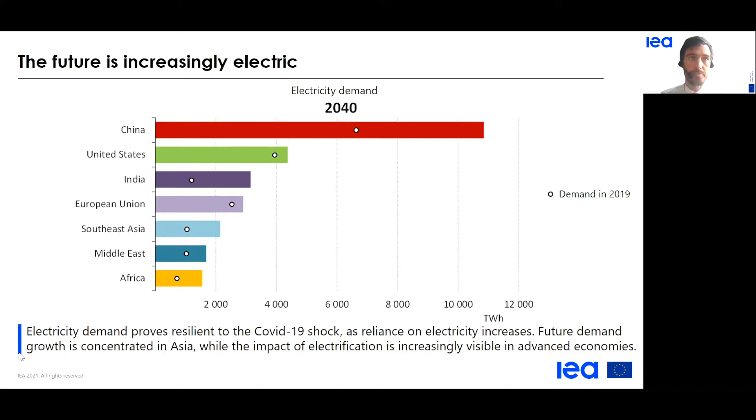And reasons for this growth are solar PV cost declining all over the world, strong policy support, and cheap financing, making solar PV the cheapest electricity source in most regions and most countries of the world.

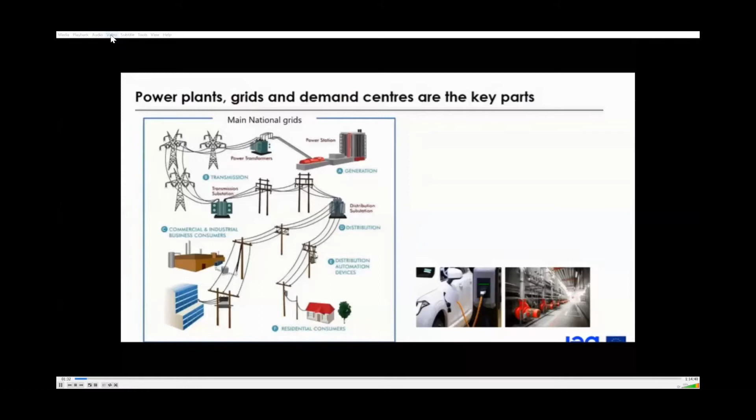And third, between those two groups, you have the grid, transmission, distribution grids, and other related infrastructure, that connects those two broad groups. So this is for the grid connected element of power systems. You have, in addition, some off-grid elements. They can be divided between mini-grids and standalone systems.

We need now to remember that this is a picture taken at one point in time. For example, regarding the national grids, traditionally this has been only one direction flows from generation centers to demand centers. Now this traditional way of looking at flows is becoming blurrier and blurrier. You can see that more and more consumers are generating their own electricity and injecting it into the grid. So this traditional unidirectional flow is becoming more multidirectional.

So that is on the national grid side. On the off-grid side, we can think that some off-grid elements can at some point be integrated in the national grids. Mini grids can be connected at some point in time to the main grids. So in this presentation, we will look mainly to on-grid systems, and we will leave the off-grid ones to a separate webinar.

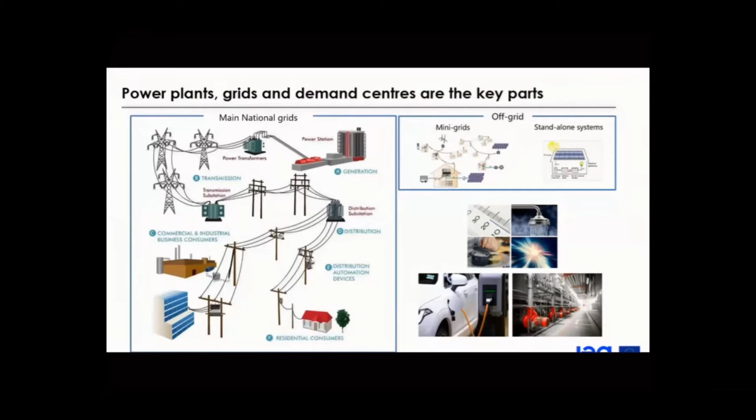Today, we will focus mainly at the supply side of things. We will focus really at the generation part of the power sector. Of course, demand side is really important. Electricity demand level, electricity demand shape will really impact the power sector's operation and their evolution over time. Over the course of the year, over the course of a month, over the course even of a day, or even at a shorter time frame, this will have impacts on the operation of power sector generation.

So more on demand. We looked yesterday at end-use sector energy demand. Electricity accounts for a very important part of it. At the global level, we are talking about one fifth of end-use sector energy demand that are met by electricity. And if we consider that electricity has a higher conversion efficiency compared to other fuels, other energy vectors, then this share of useful energy is even much, much higher.

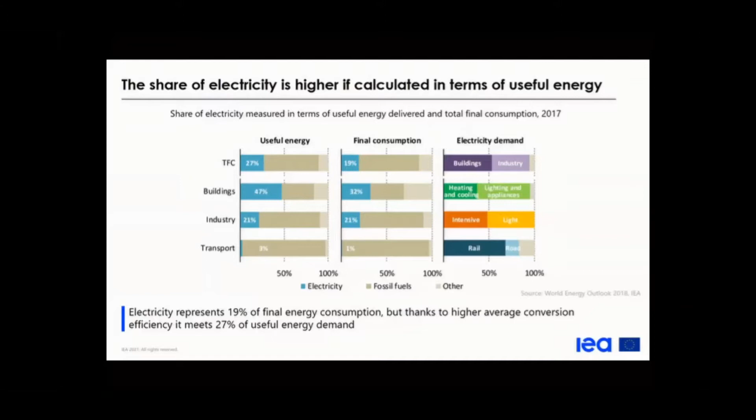Going forward, one very important characteristic to keep in mind when we are talking about electricity is that it cannot be stored in large quantities or for very long periods of time. We have some exceptions, thinking about large hydro storage facilities, for example. But the point is that it's very different from other energy commodities such as oil, such as gas, such as coal.

The consequence of that is that we need to balance the system all the time. Electricity demand must be met at all time by electricity production, and for all this variation that we see over the course of the year or at even the second time frame.

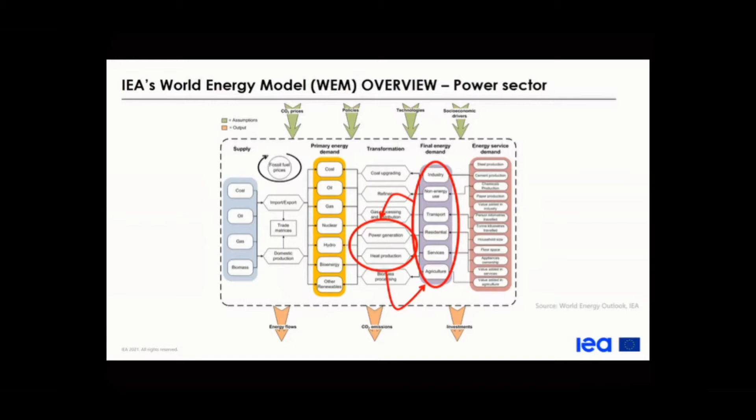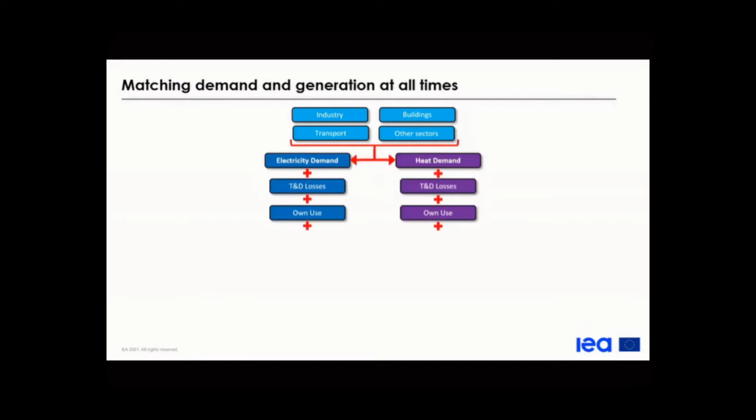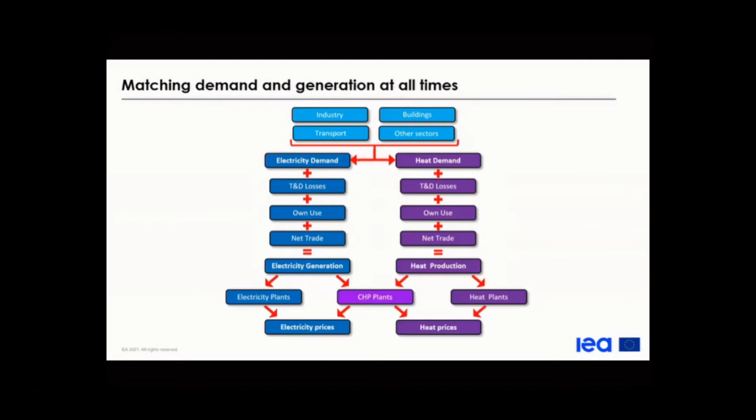So if we look at this point with a very, very simple schematic, we can see how electricity demand is different from electricity generation. In electricity generation, we account also for the grid losses, the own use of power plants, some electricity trade that can occur between countries, between regions. Let's think about power pools where trade can happen. So the total generation needs to be met by the producing facilities, which determines the electricity prices. And then there is this feedback to end-use sectors' demand.

Now let's move on to the next section of this power supply modeling session. So we will touch upon more in detail what are the sub-modules of the power sector module in our model.

So if we have a closer look at the power sector generation module, we have inputs flowing in. We need a lot of historical data, such as capacity by technology, by year. We need information on the generation mix, the fuel consumption. On top of that, each technology has a different feature. The cost, the capex of each technology will be quite important to drive our module.

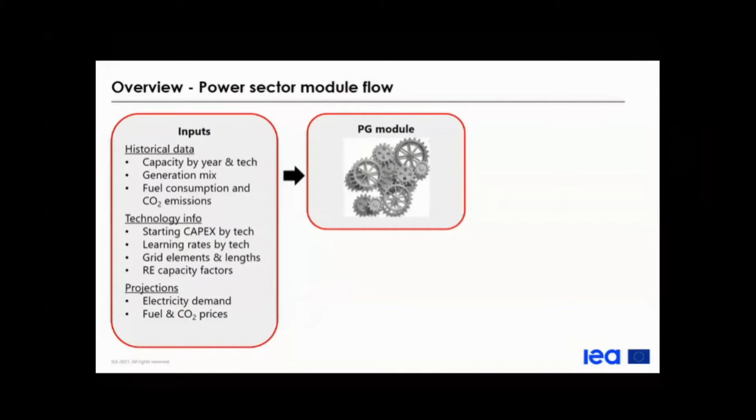We also have learning rates, which make this cost evolve over time as we have learning by doing. We need some grid elements, such as the length of the line, and also capacity factors. On top of that, some elements are linked to projections from other modules.

As mentioned earlier, we need electricity demand from the demand module. On top of that, fuel prices that would come from the supply module, and CO2 prices in regions that have applied these kind of policies. Talking about policies, we have constraints also.

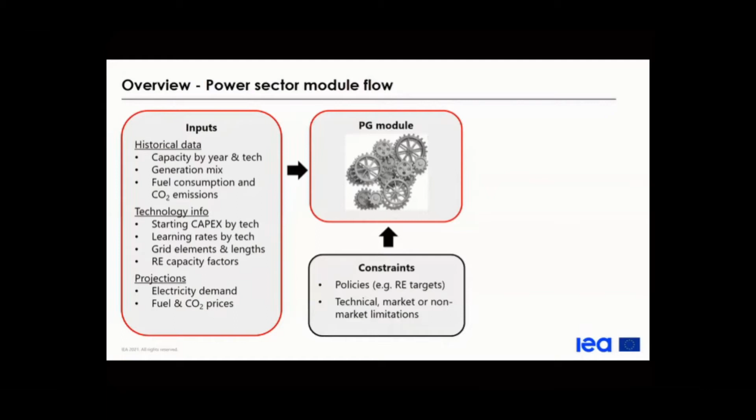Other policies than CO2 pricing can be renewable energy targets, but other constraints can be market or non-market related or technical. As output, we are able to derive capacity, network length, generation, fuel consumption, cost, investment, and electricity prices that would then be implemented as a feedback loop for the electricity demand module.

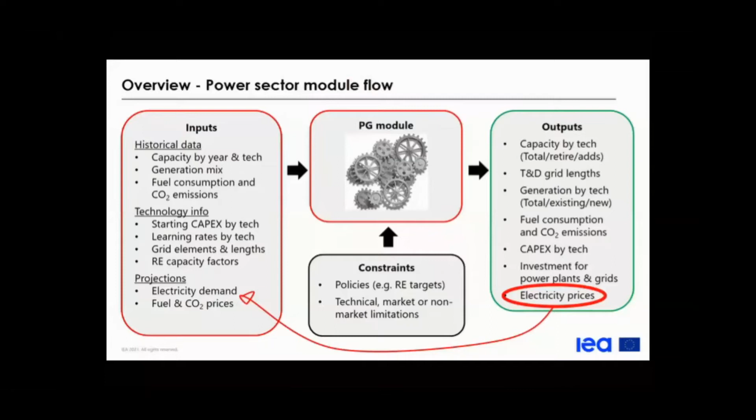This is a more detailed diagram of the power sector module. Here you can see that there are two central points in this module. We have the capacity addition mechanism on the left.

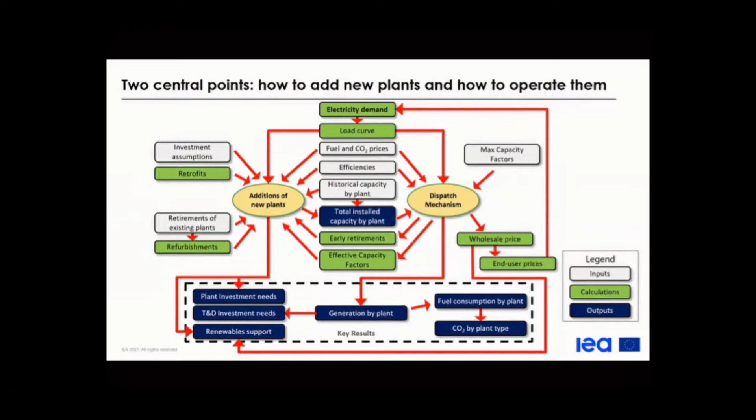Maybe before digging in, an important consideration to have in mind here: when we are talking about the needed installed capacity in a power system, there are two components. We build it to meet demand, but also because our power plants have a lifetime.

So existing plants today will be retired in the future, and so new capacity additions will need to compensate for these retirements, and on top of that, increase to meet the new demand.

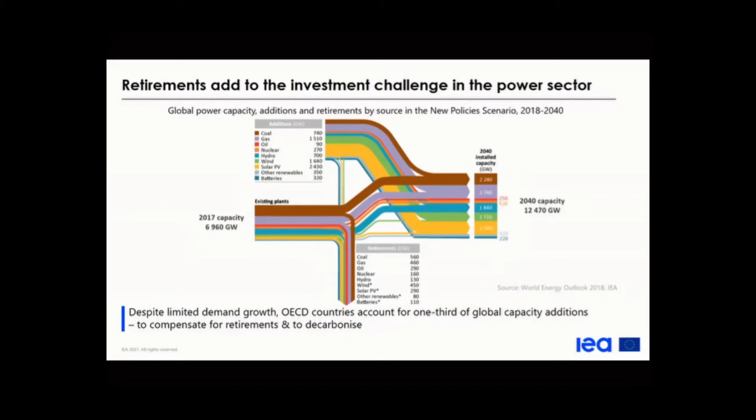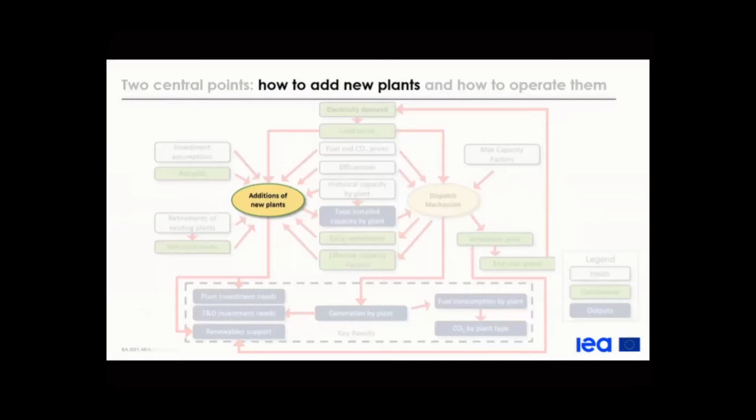Let's start with the capacity addition module. We need first to remember a key characteristic of the power sector, which is that supply and demand must match at all times. Looking at demand, we have a constant variation over time.

Here we can see the hourly electricity demand, and we can see how it changed over the year with strong variation among seasons, which would depend obviously on the country.

If we could look at monthly changes, we see as well some variation. During the week, we see higher demand during working days. And during the day, higher demand during daylight hours compared to nighttime hours.

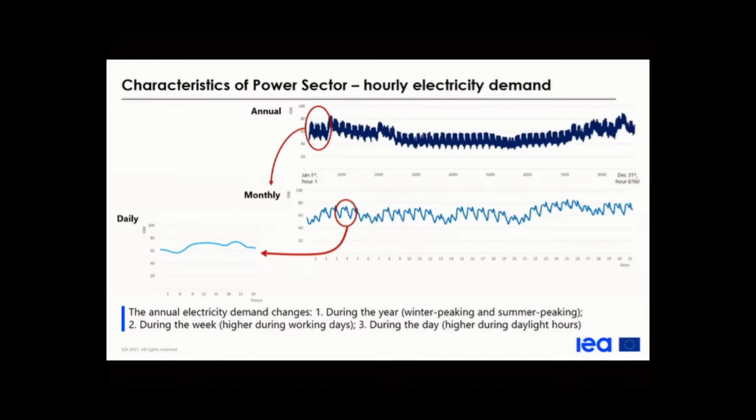To model power supply, hourly electricity models can be used. We have this kind of models here in the World Energy Outlook team for several regions: the United States, China, India, and the European Union.

But this is quite a complex kind of modeling, and it requires a lot of data. It requires very powerful computing capabilities.

So when we look at the annual granularity, we make some assumptions, some simplifications, to still consider the time period granularity, but keeping it in a simpler way.

A very common simplification is to reorder the hourly electricity demand from the highest point, the peak hour, to the lowest value. This is what we call the load duration curve.

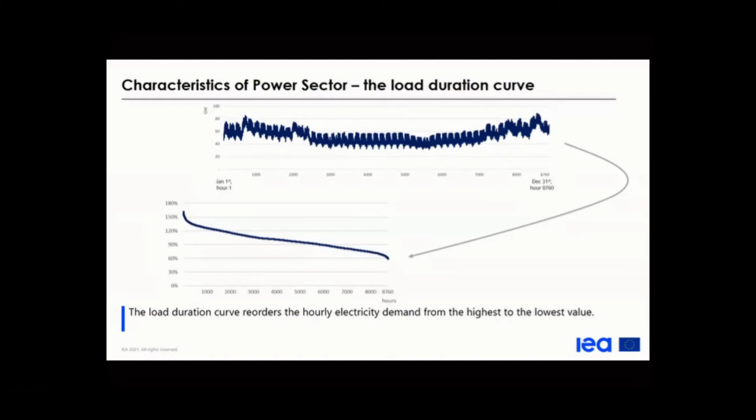So this is how we proceed. We can divide this load curve into several homogeneous segments.

The most typical division being peak, mid, and base - four periods of time here, the highest being the peak segment, the lowest the base load segment, and in between two mid-load segments.

Given the evolution of electricity demand over the projection period, the evolution of total dispatchable capacity can be estimated through two steps. First, the peak to average ratio, remember this 160% above average that we saw in the previous example. We calculate this peak to average ratio based on the analysis of historical data and the evolution of different end uses, for instance cooling needs or electric vehicles, which can make this demand peakier.

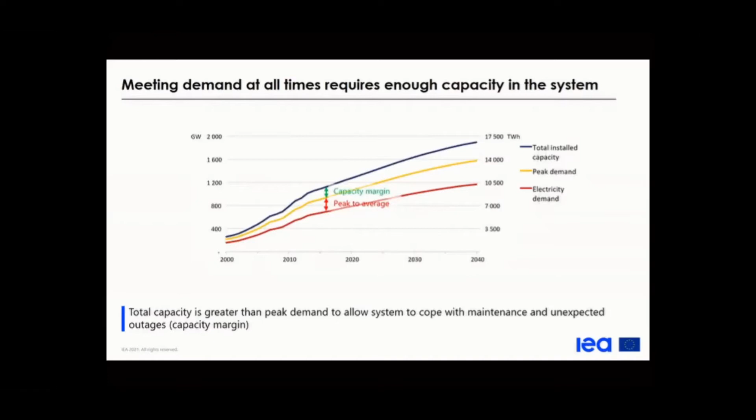Then, to have more reliability on the system, it is not only the peak demand that needs to be met. We build the system to meet that peak demand, but we have a level of security, what we call the capacity margin. This is an additional amount of dispatchable capacity to be sure we have a reliable system, even if some plants are down for extreme reasons like rupture of supply chains. This capacity margin sits on top of the peak demand to make sure the system meets demand at all times.

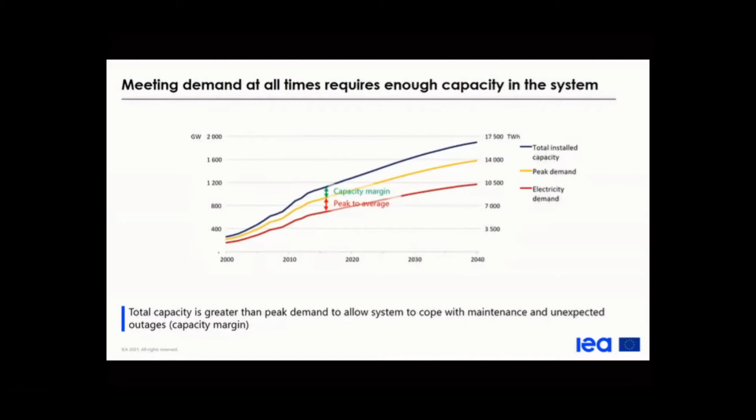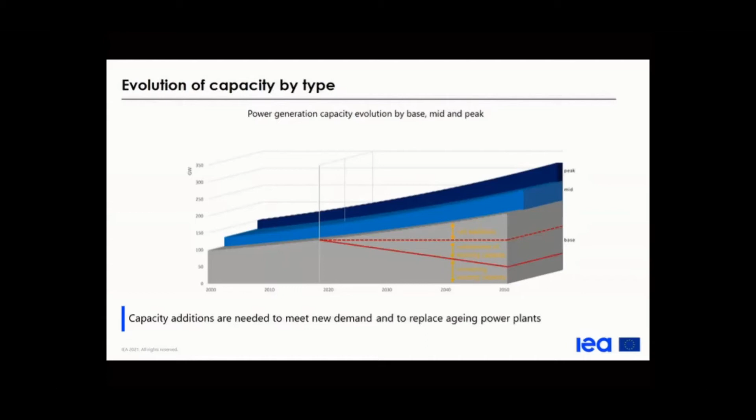Coming back to the different time slices. As we saw earlier, we considered a base load type of plant, mid load type of plant, and peak load type of plants. For each time slice, the new additional capacity needs to take into account all three different time slices. We consider the net addition needed to meet new demand, and as mentioned earlier, the addition needed to replace the retiring plants.

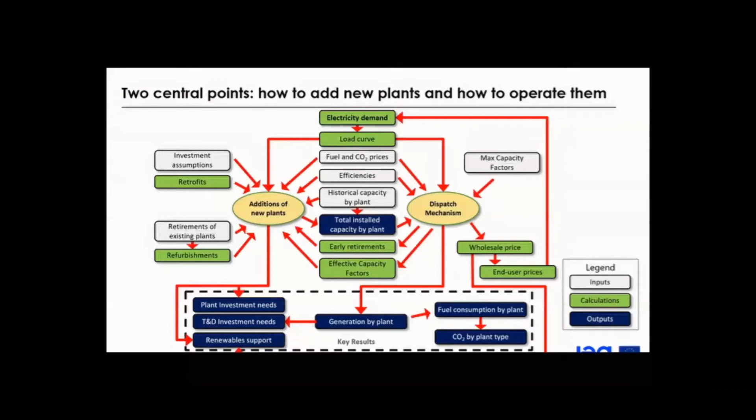So we're really focusing on this part of the model. We have several dispatch mechanisms available when we model how plants operate. This is really aiming at determining which plants, which technology, will generate at which point in time, within the hour and within the year, given a number of constraints such as availability, flexibility, and the technical constraints of each plant type.

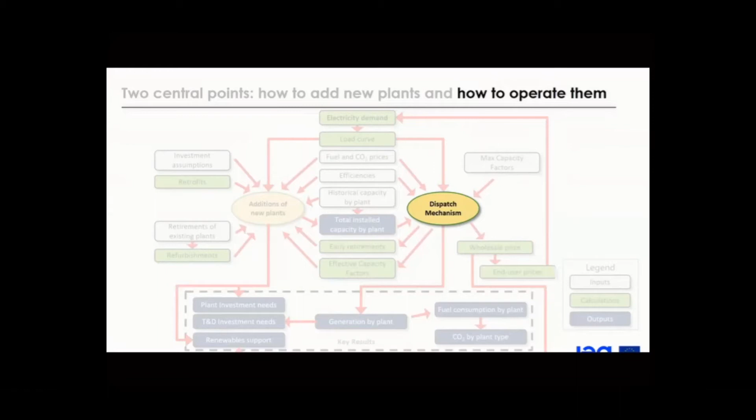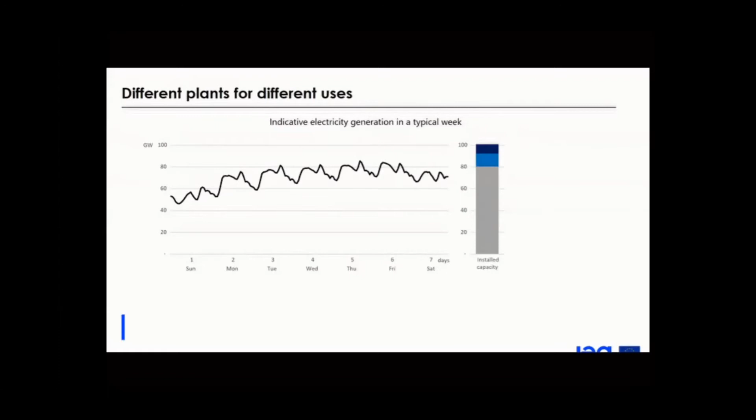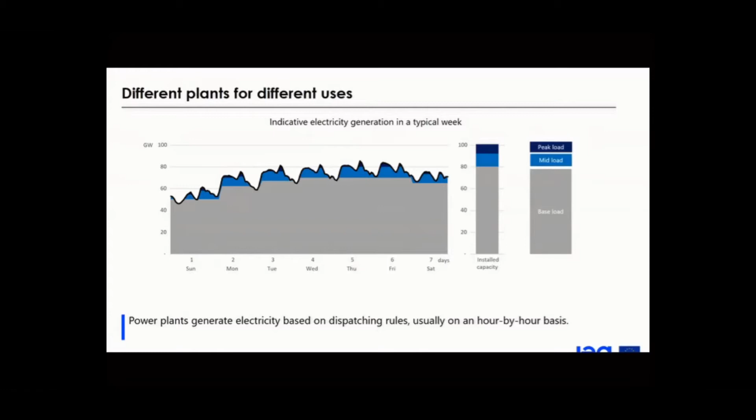Given a certain level of demand and a certain amount of installed capacity depending on the type, power plants generate electricity based on dispatching rules, usually on an hour by hour basis. What is important here is the utilization rate, meaning during a year, how often these plants operate.

In gray, baseload plants would operate generally with capacity factors or utilization rates around 80%. 80% of the year, baseload plants would be used to meet demand. Midload would generally be used 50% of the year, and peak load plants run much fewer hours. As you can see on the graph on the left, they're used really for peaky demand, so they have a much lower capacity factor, generally below 10%. Here in this example, we have 7%. This is a very useful indicator, this capacity factor. It can be used in the modeling to add additional constraints on the maximum generation of a group of plants. For example, you could set as a constraint that a gas turbine cannot be used more than X% of the year. This is used to simulate operational constraints and also grid bottlenecks.

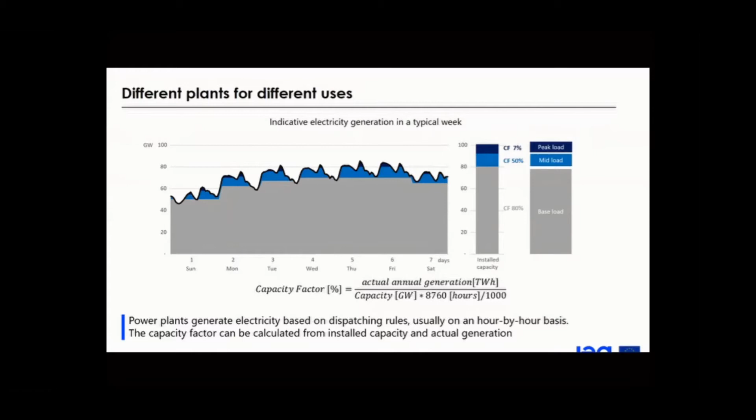For example, for baseload plants, the off-peak price would be determined mainly by nuclear, lignite, and steam coal during baseload hours, and similarly for mid-load and peak load demand. When we average this resulting price over the whole 8,760 hours of a year, we can determine the average annual electricity wholesale price.

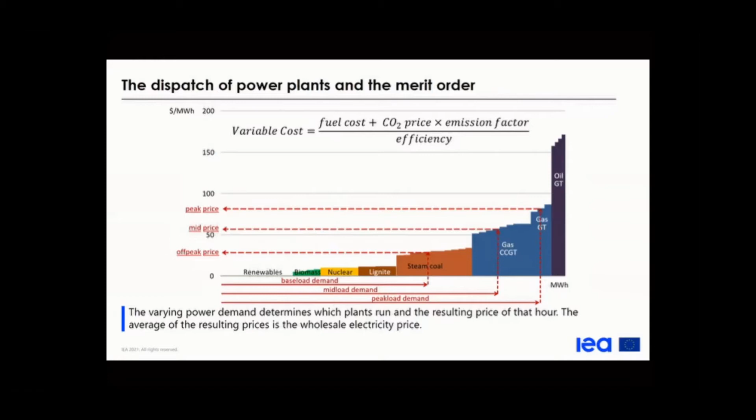So why is the dispatching mechanism important? This module helps determine a number of very important elements: how plants are operated over time, how much electricity is produced by each technology, which plants will be generating, the fuel use and associated emissions, and, as we saw in the previous slide, the price.

To sum up, the result depends on many factors: from the capacity addition mechanism, which plants are in the system for each year of projection, the relative price of coal, oil, and gas that would impact the variable cost and therefore the merit order, whether there is a CO2 price that would penalize the most carbon-intensive technology, and again, the changing level of demand.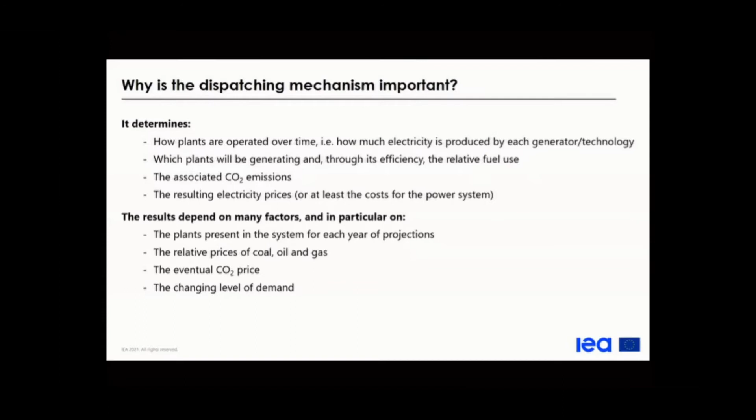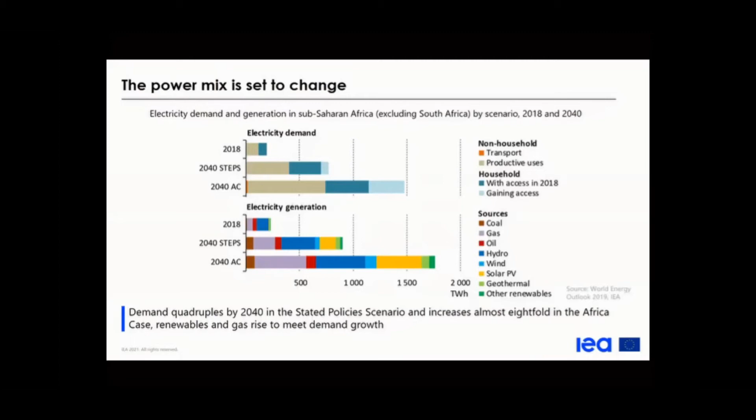Coming back to the diagram, we have now covered the two main components: addition of new plants and the dispatch mechanism. Next, I would like to focus on other very important elements of this power system, which is how much fuel is consumed by plants and the consequence of it, the CO2 emissions by plant type.

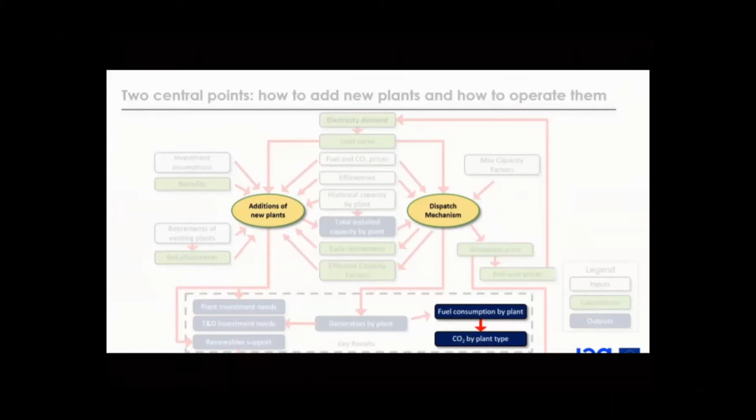So once we have electricity generated from the dispatch module, one key element to consider is the efficiency of these plants. This is really key to determine the overall efficiency of the park and therefore the fuel use by type. Fuel use by type is really important when considering domestic production and energy security considerations - how much oil would need to be imported, how much gas - it's very much linked to fuel use consumption in the power system. From generated electricity, we derive that using efficiency of plants.

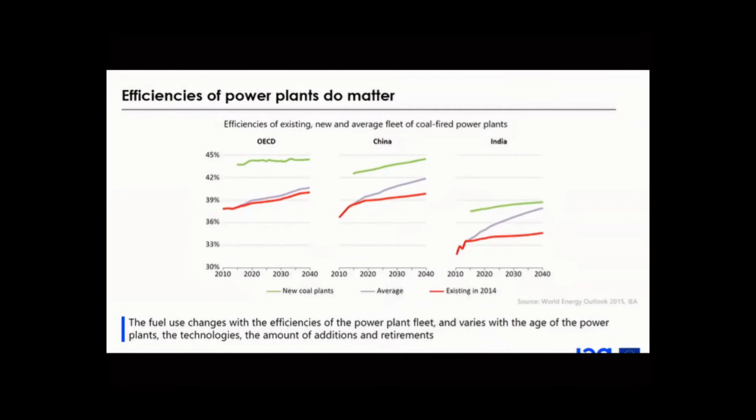This can be linked to two main factors. First, each fuel has a different carbon intensity - coal being the most intensive, whereas gas is the lowest intensity technology. So a shift from coal to gas would have an impact on the CO2 emission per electricity generated. The second main driver is efficiency, which limits the fuel input per electricity output.

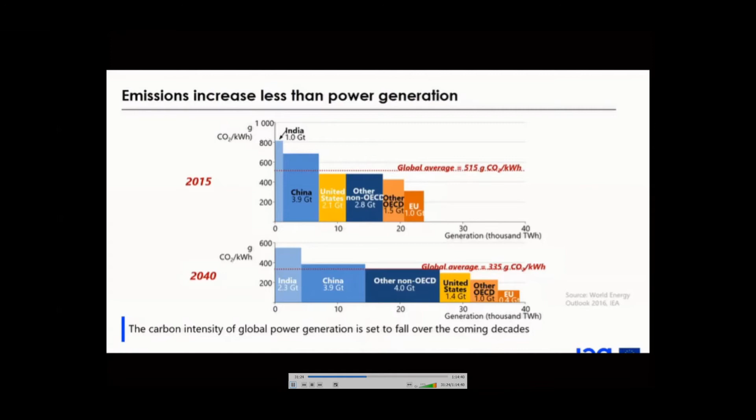So to pursue climate goals, CO2 intensity will need to be strongly decreased thanks to the massive deployment of low carbon technology, but also thanks to a shift to lower emitting fossil fuel technology and improvement of new technology so they are more efficient.

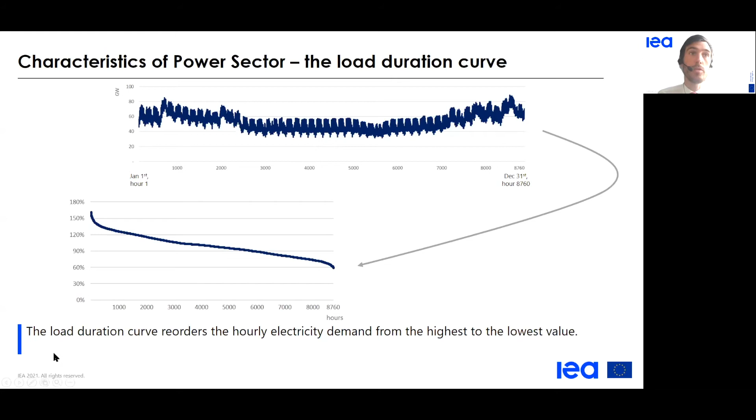And then we use this information when we look at total electricity demand in the future. Remember, we want to know what will be the electricity demand and what will be the need for capacity to meet this demand. So we can make our predictions on electricity demand maybe based on annual values, but then we look at this difference between the time where we will have the peak versus the average, and this is the 160%. We add a capacity margin, and this is how we get numbers on what shall be the generation to meet demand at all times. I hope this answers the question, but happy to elaborate more.

So there is a very interesting question on carbon pricing mechanism. I'm sorry, I don't know much about it. I know we are working a lot with South Africa on this topic to implement or support carbon markets. What I know is that, as described by Yasmin, putting a price on carbon can really influence the dispatch mechanism and the choice of using one specific power plant rather than another one based on its emitting factor.

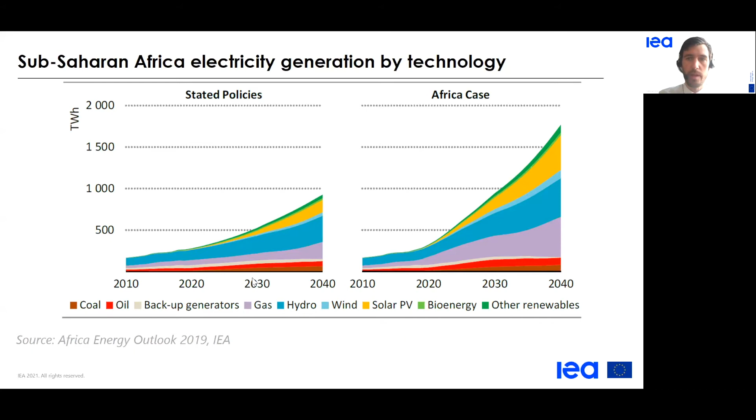our results according to our analysis, which are all coming from the Africa Energy Outlook report, where you can see how the electricity generation mix evolved since 2010 and how it could evolve according to our two main scenarios. And you'll see a very important rise of solar PV, of hydropower too, but also of gas as a source of base load generation.

Okay, so now I'll give the floor back to my colleague Yasmin to discuss with you more the economics of power systems and then the integration of variable renewables like solar PV and wind.

So we already looked at some economic concepts when we discussed the merit order and variable costs. I'd like now to expand a little bit more on that. In this section, we will now touch upon some other quite important aspects of power system economics.

One very important aspect is how to evaluate the competitiveness of the different electricity generating technologies. Competitiveness depends on several factors, of course cost components, but also when the plant is used, the time of use, and where - for example if there is grid congestion in a specific location. It also depends on the value side of things, the value of electricity generated, and prices, which could be higher generally at peak demand time.

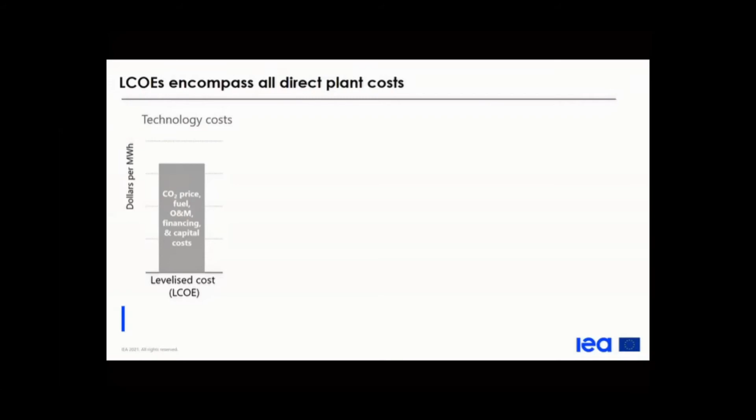So this can be quite a significant and disparate set of costs, depending on the technologies. We can see here how the LCOE really does a great job at putting them together in this general formula for calculating the LCOE.

We have a more simplified form as well. The idea now is not to look in detail at this formula, but I would like to highlight one point: we have two main components, the variable cost that we use also in the merit order, and the fixed annualized cost. These two components change according to the type of plant, and the relative importance is different depending on the technology.

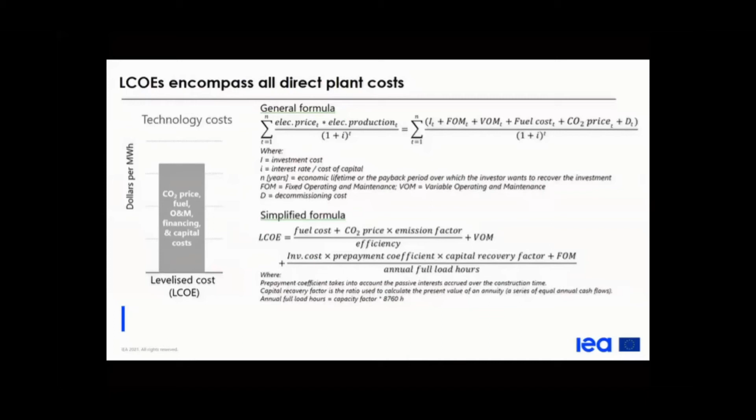One quick example to illustrate that point is to look at LCOEs by technology in the United States for 2017. Typically, low carbon technologies such as nuclear, wind, and solar PV have a high fixed cost and very low variable cost. On the other hand, gas, and to a lesser extent coal, are the opposite, with high variable cost and relatively lower capital cost than low carbon technologies.

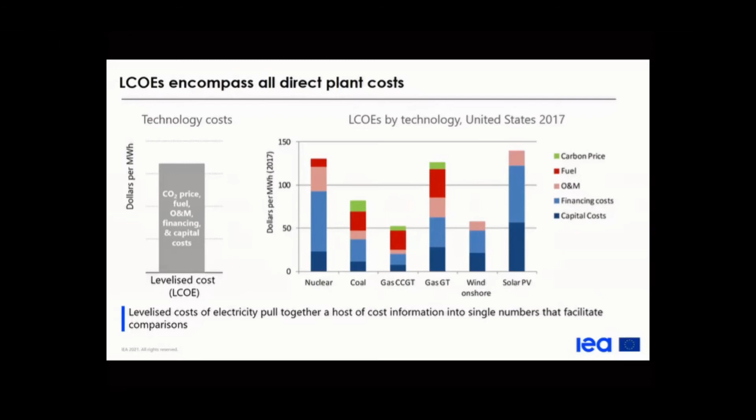Another point to highlight is that financing can be quite a significant proportion, especially for capital intensive technology. And if you have to pay a rate that reflects a very high market risk, then financing can be more important than the actual cost to build the plant itself.

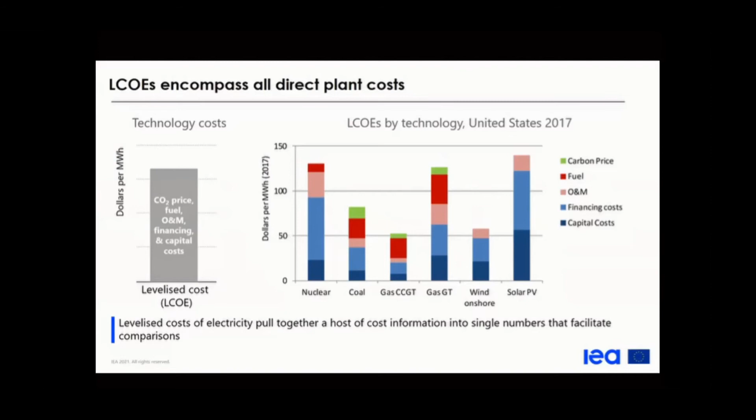One limitation of the LCOE, especially in the simplified formula, is that the capacity factors used are often fixed. So another very useful way to look at things is to see how the cost of power plants is changing depending on the amount of time these plants are used.

This is what we call the screening curve. In the screening curves, you would look on the y-axis at the fixed annual cost, and it would show how the cost would increase over the time of use over the year, depending on how variable costs are evolving.

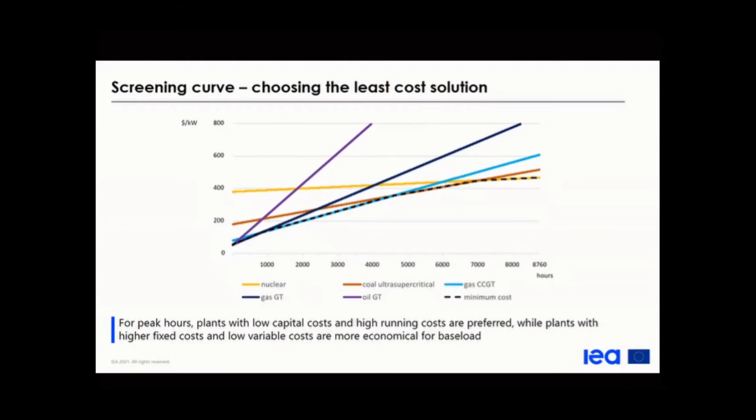This shows different types of technology, and it's really helping us to see the least cost pathway, the least cost solution for each type of utilization, meaning at peak demand, when the number of operating hours is really low, up to the baseload operation of power plants when they operate all year, 8,760 hours. So you can see this least cost path on the screen right now.

What is also very clear with this graph is that power technologies really provide different services. We can consider nuclear power and coal plants very well suited for baseload operation, the baseload category, so it actually makes sense to compare them in terms of LCOEs. But it would be very difficult to compare a nuclear plant and a gas turbine, or GT, which usually provides peak power, as we can see here.

Another point is that this curve is valid only for dispatchable plants, and therefore wind and solar PV cannot really be included. They run when the wind blows and the sun shines, so they don't really fit very well in this traditional categorization, baseload versus peaking plant technology. So the question is, for these technologies, can we really compare the LCOE to dispatchable technology? That's one of the limitations of LCOE, especially for renewable plants.

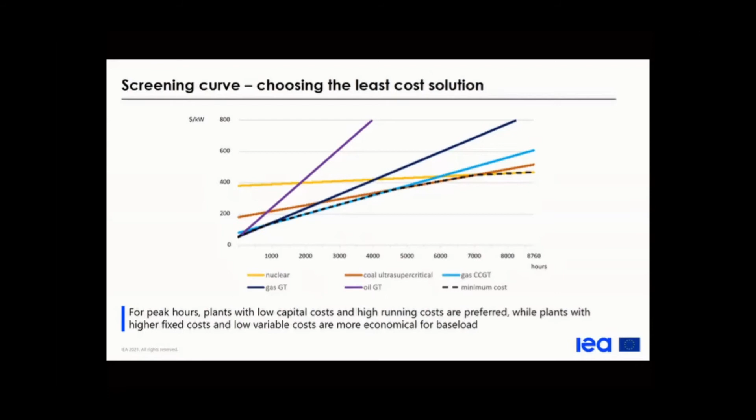As mentioned, LCOEs are very widely used, and this is because they allow you to present in one concise number the generation cost of a plant over its lifetime. There are, however, some limitations, and we really need to keep them in mind when we are using this indicator.

I will focus on one of the key limitations: it doesn't include the value of electricity generated. So basically, if you are an investor looking at LCOE, you must keep in mind that it doesn't encompass anything on the revenue side of things.

The second limitation is that making comparisons across different technologies is complex, or wrong. You need to go beyond and look at the screening curves, as we did earlier, for dispatchable technology. And this screening curve concept cannot be applied to renewables technology because of these categories between peak and baseload plants.

We really feel the need to go beyond this limitation. It does a great job, but we want to overcome it. And that's the concept we've been developing here at the IEA: the value-adjusted levelized cost of electricity.

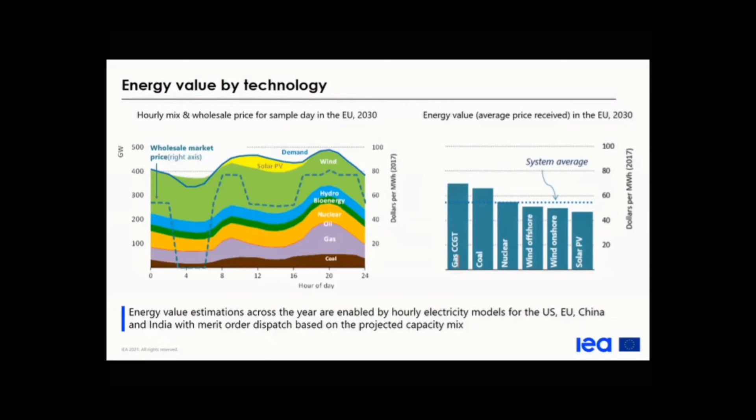Now, how do we put all the pieces together? For a particular technology, we start with the LCOE. Then we simulate in a given year the energy value for this technology. We do that for all technologies, so we are able to compare to the average energy value of the system.

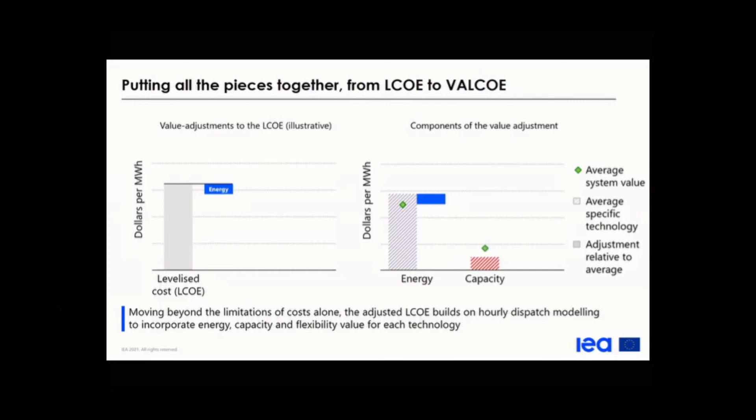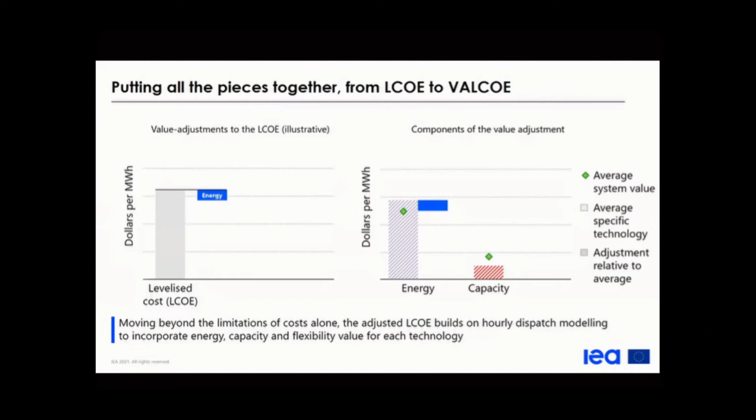Now on the capacity value, the contribution to adequacy here is relatively low compared to average, so that means the technology is less competitive than others on that specific category - less competitive, therefore more expensive. And now the flexibility value - again, not a very high value compared to average, less competitive, so we adjust by increasing the cost side of things.

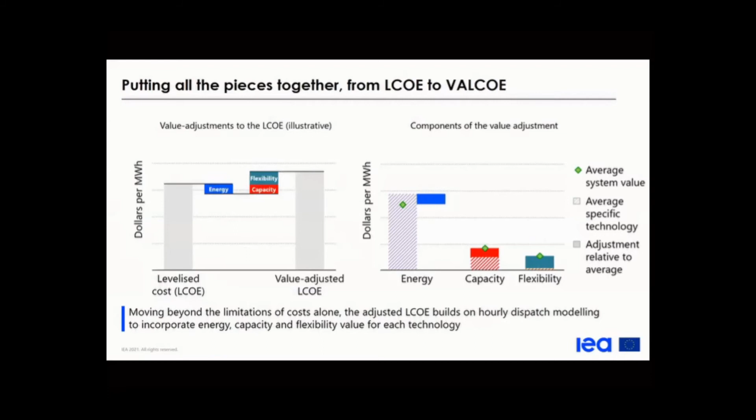So we take all these three value adjustments, we apply them to the LCOE, which leads to the value adjusted LCOE, the VALCOE.

So now to summarize the VALCOE concept, it does provide a more sophisticated metric of competitiveness. It includes these elements of value that the LCOE was missing, and makes it robust across a wider set of technology. It is not perfect - a few of its limitations include that it's not site-specific, so the network integration cost, for example, is not there, and it doesn't include externality costs that are not priced, such as air pollution.

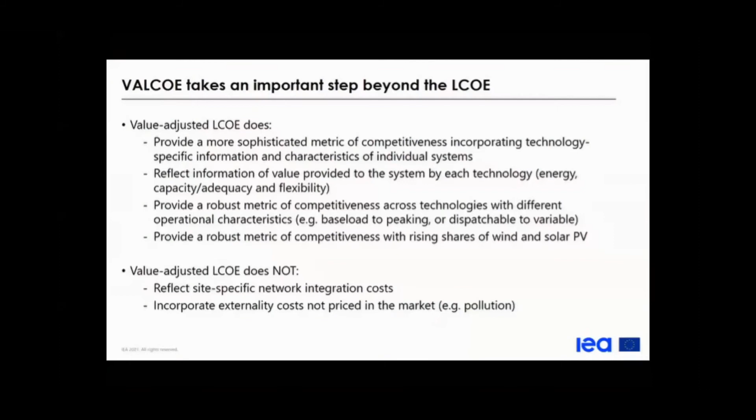The VALCOE is not the only metric looking beyond the LCOE. For example, cost and benefit aspects are already taken into account in profitability calculations, such as the net present value. We have also some academic research looking into it, and the US Energy Department has similar metrics. In the real world, we have applications of very similar concepts in some auctions in Mexico, for instance. So to conclude on this concept, it's really part of a bigger family of beyond-LCOE metrics that aims at providing useful information for energy modelers, system planners, and investors.

Talking about investors, a very important outcome of models is the amount of investment needed overall in the sector and for each technology type, as well as all the related infrastructure. Beyond spending on power plants derived from capacity additions and their unit capital cost, we also see that electricity networks need to be expanded, maintained, and digitalized.

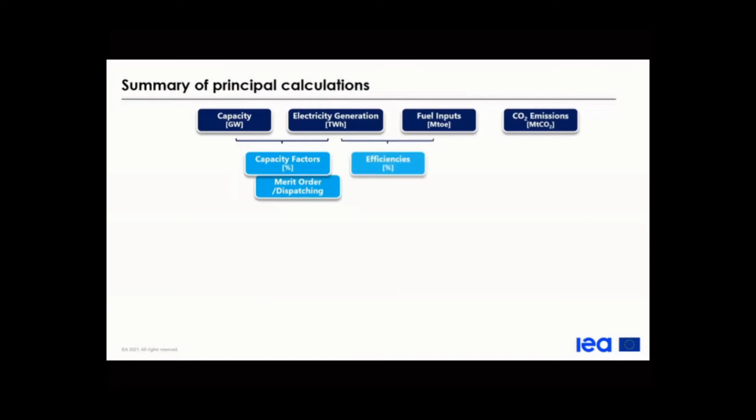We have capacity factors and merit order that link installed capacity and electricity generation. We have efficiency that connects electricity generation and fuel inputs. Fuel inputs and CO2 emissions are related through emission factors. When we have gross capacity addition, this helps us determine the evolution of overall capacity by type, and we can calculate total investment thanks to unit investment cost. All of these elements are related between them, and they are summarized using the LCOE metric, despite its limitations.

We have now reached the last part of our presentation on the power sector. For this very last section, I would like to introduce the basic principles of the concept of variable renewables: what are their constraints, and what are the solutions to integrate them into the power system?

So why are we looking at wind and solar PV technologies? The answer is quite easy: they really represent the biggest change and success story of the last 15 years. Solar PV is the new king. It's the most built technology over the past 3 years, and it's the cheapest source of electricity in most countries around the world. Beyond these recent and historical trends, we see, looking forward, a greater role, a greater share of this technology to decarbonize the power system in the future, and to decarbonize the whole economy.

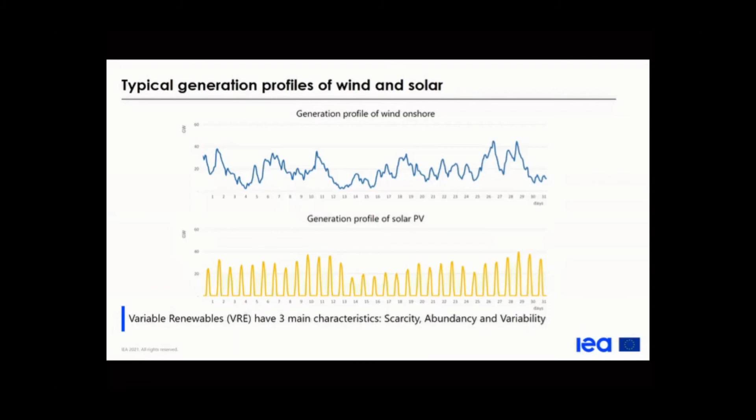Scarcity is the situation that happens when these non-dispatchable, variable renewables do not provide enough generation to cover demand, requiring other types of plant units to ramp up to meet demand. The second point, abundancy, is the opposite: it's when we have too much generation, too much output from wind and solar PV in the system, which leads to excess generation compared to demand.

We saw an example earlier with the European Union. The third category, variability, is really the extent and speed of the change of outputs. For instance, the speed at which solar PV ramps up for the noon peak and ramps down when evenings come, that needs to be compensated by other means of production.

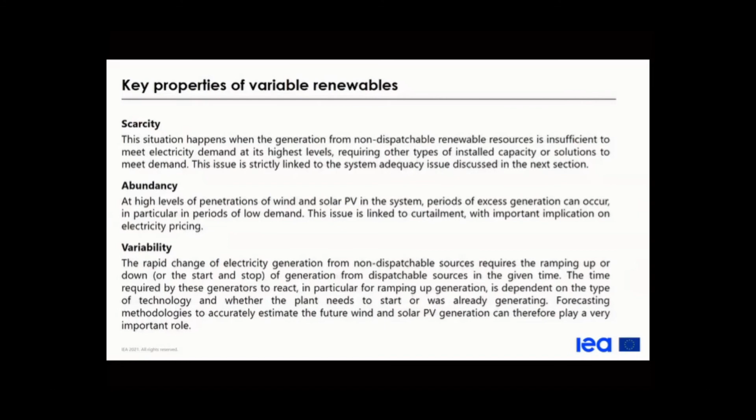The impact of variable renewable energy sources also depends on the level of deployment. At low levels of penetration in the mix, the effects are really negligible—power systems were already built to be resilient, to accommodate the variability of demand. When solar PV and wind share is low, the hour-to-hour variation of demand has more effect on the system than the variability coming from wind and solar PV. But when we go beyond that, we begin to see some impact, including impact on total installed capacity.

One key issue is the higher flexibility needs that would be needed from the system, the higher ramping requirements. There is an impact on the load duration curve, on dispatch, on prices, and consequently on market design. And finally, an impact on how the network is used, on how it can accommodate this variability.

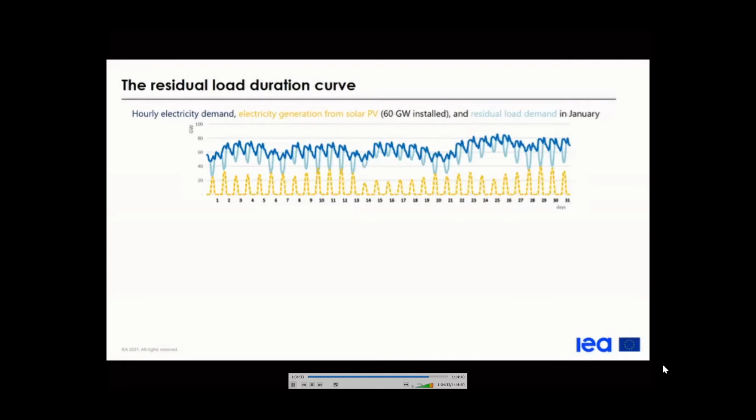Then, same concept as the load duration curve, we reorder the hourly demand from highest to lowest. Depending on the penetration of solar PV, you can see different impacts, the biggest being the one with 60 gigawatts of solar PV.

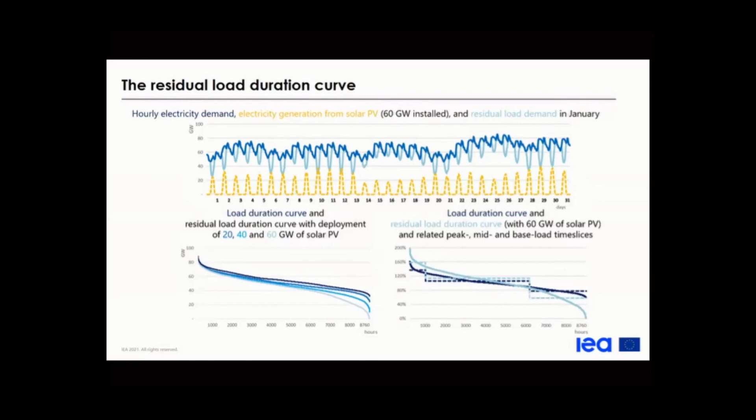Looking at this example of 60 gigawatts and focusing on it, we can see it generally has the main structure, but steeper than the original load duration curve, with big differences for base load and peak load generation. This is a peakier load duration curve that requires less base load production means.

We can have a clearer view of this phenomenon in this slide, where we can see how this would impact the total firm capacity needs. They do not change significantly overall, but as mentioned, there are more peakier needs and less baseload needs.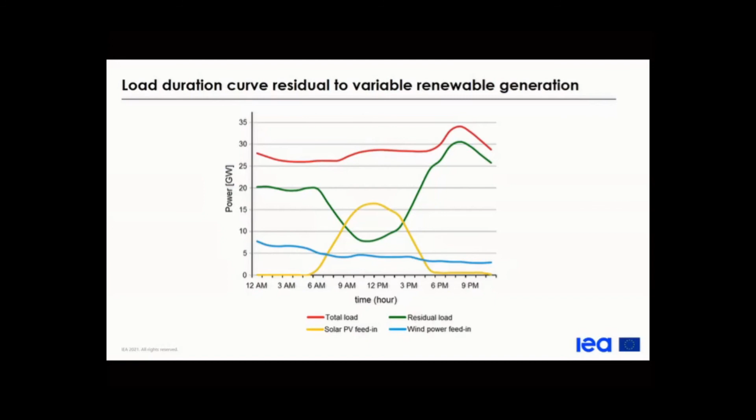This is the basic concept behind this very famous curve, showing the impact of growing variable renewable production in California—the duck curve. We can see the stomach of the duck getting bigger and bigger as the share of variable renewable production in California increased, and the neck becoming steeper and steeper, an unfortunate conjunction of decreasing output for solar combined with a peakier demand with an evening peak.

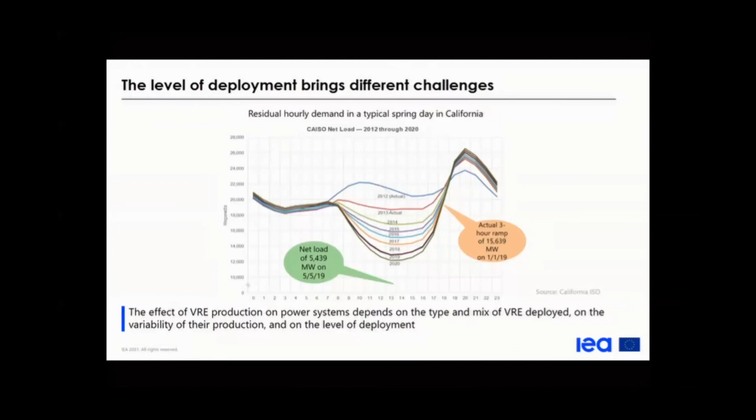So now that we've described this impact, how can we put a quantification on it? First, a very concrete way of measuring it is, in case of excess, the amount of curtailment needed. The impact would also be seen in the number of hours with near-zero price, which we saw earlier in the case of the EU.

One implication of this is that it would decrease the attractiveness of new projects. If we don't tackle the integration issue, new renewable projects would be less and less attractive to investors, and this would compromise the pace of change—the pace of the energy transition. So we need to avoid or at least limit the extent of this implication.

The good news is that we have several integration measures available to policymakers, to planners, and for markets. We can summarize this in increasing the flexibility of the power system, energy storage, demand-side management, as well as interconnection between demand areas, between countries, between regions, and the role that transmission and distribution grids would play. These four categories—I'll come back to this in the next slide.

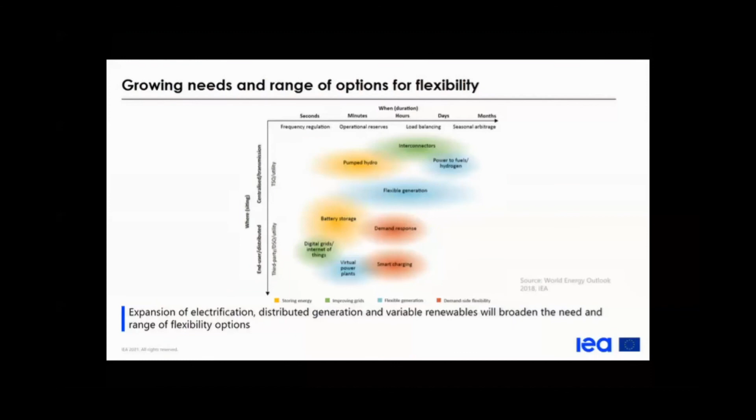These options range from very short-term flexibility within the minute or even second time frame—this short-term is on the left, for which storage is quite well suited—to very long-term seasonal arbitrage, where grids would play a role. Flexible generation is a bit everywhere in this landscape.

So we have seen that we have flexibility needs at the second time frame and at the seasonal time frame. One way of measuring flexibility needs can also be at the hourly level, specifically the hour-to-hour ramping needs to fully integrate wind and solar PV and respond to changes in demand.

Here you can see those needs in 2019 in four major regions. Each dot represents an hour of the year. For example, across the entire European Union, we can see that a very large upward change in dispatchable output from one hour to the next was needed—about 20%. This happened when demand was rising and both solar and wind power were declining.

So this is today, but in the future flexibility needs will be much, much higher. The changing shape of electricity demand and the strong growth of solar PV and wind power together are increasing flexibility needs in power systems around the world.

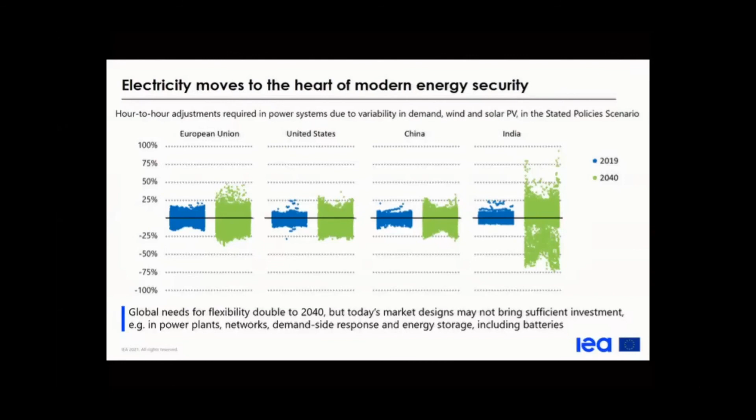Average hour-to-hour ramping needs almost double across most major power systems by 2040, with much higher increases in some systems. We see a striking trend for India, where in certain hours we will see the need for dispatchable sources to ramp up or down by well over 50%.

The good news is we have those flexibility sources I talked about earlier: power plants, electricity networks, storage technology, demand side response measures. Coal and gas-fired power plants are today the main source of flexibility, and they remain so in the future. There are also some contributions from low carbon sources like hydro and nuclear power. But looking ahead, many power systems will need to rely on other means.

Storage and demand side response will play a central role in flexibility, provided we have the right policies and regulation to make this happen. And of course, on top of all these sources are grids. So solutions exist, they have a different range of impact, and the optimal mix of solutions would depend really on the characteristics of each power system.

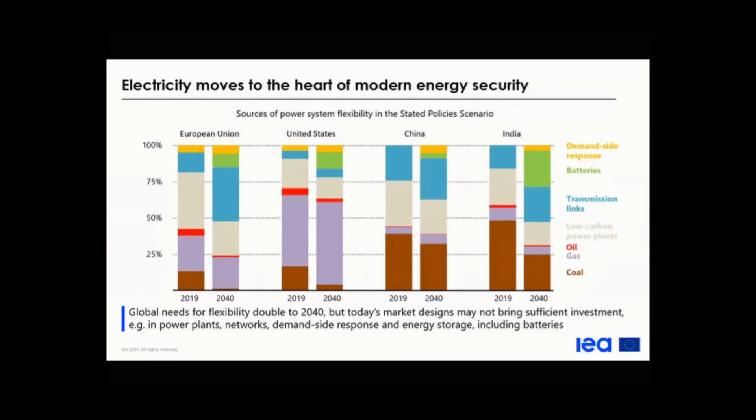Okay, so now we have some time for questions, and Jasmine just joined us to answer some of them. Hi, Jasmine. Hello, Arnaud, and hello everyone. I hope you had a good time with this modeling session. I'm very happy to answer as many questions as you might have. I saw there were already some. Arnaud, how do you want to proceed?

I'll start with the questions that have been asked before. There was a question asking if capacity margin is the same as capacity reserve, and yes, the answer is yes. You just take a margin above demand to make sure the system has a margin of security above this. So it's exactly the same concept.

Then there was a question related to the value-adjusted LCOE, and whether instead of taking the flexibility value on one side, it could make sense to factor it into the cost side of the value-adjusted LCOE. This is the same concept—either you put it in the value side, or you reduce or increase the cost side. This would be a different way of doing the same thing. For instance, the US Department of Energy does it that way, so it's just another approach leading to the same concept.

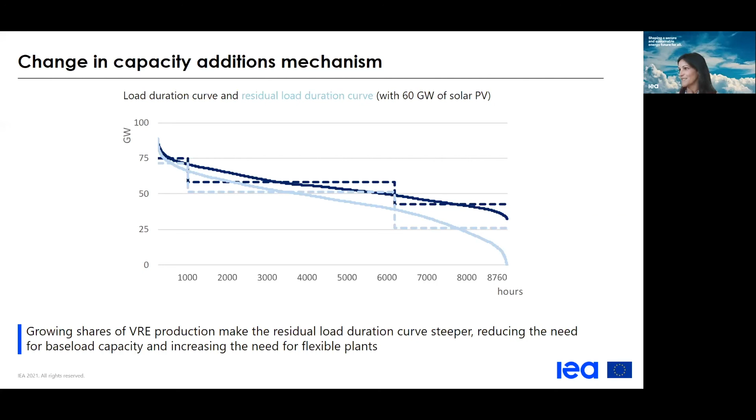Okay, here we are. I think. No, just after. Or maybe just before in your slide deck. So yes, this one. This one is perfect.

This curve was built based on the hourly results. So when we want to model, we need to have the load profile at hourly level, and the PV supply profile at the hourly level. Then we are able to derive that light blue curve, taking into account when it's dark and when demand is low. This is the resulting curve that we take into account to see how the rest of the system needs to work - the rest of dispatchable plants need to work in dark, calm periods, so a base load regime.

There was also a question on the opportunity for power-to-X in Sub-Saharan Africa. Yes, the potential is very high. I can't tell you more now because the results haven't been published yet, but we're currently exploring a scenario reaching net zero emissions at a global level, and we see some power-to-X happening in this scenario in Sub-Saharan Africa.

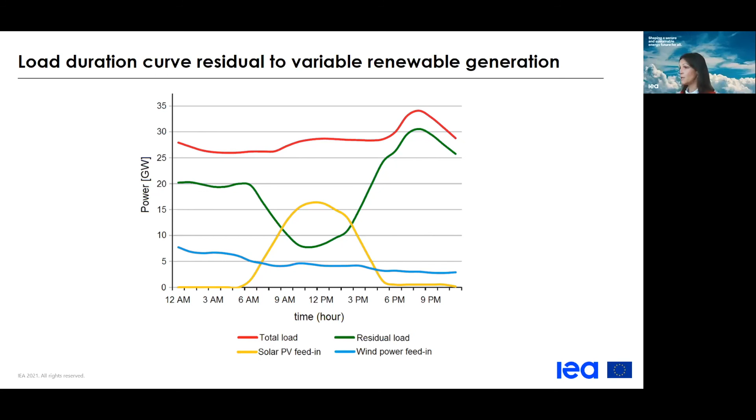There was a question on which other countries besides the EU are employing the value-adjusted LCOE. As mentioned during the session, to derive a proper value-adjusted LCOE we need information from the hourly model. We have this hourly model for the European Union countries, for the United States, for China, and for India. For these countries we can really derive all the information needed for flexibility value, energy value, and capacity value. For the other 22 regions and countries that we model only at the annual level, we derive some proxies and estimations based on those four regions.

We also have some additional information even where we don't have the hourly model - our demand colleagues have been kind enough to derive hourly demand, even if we don't put it into the hourly model, so we have at least the demand information. We also have for additional countries some results regarding PV and wind profiles, but otherwise we need to rely on some proxies to derive those values.

To be honest, having hourly models covering the whole world would be very, very difficult - the level of data needed is not available, and in many countries you wouldn't even be able to find this kind of information. But we hope to expand our modeling capabilities to have a more accurate vision of competitiveness, covering more and more regions. In the specific case of Zambia and other countries in the region, if you have available public data that you can share, we would be very happy to look at it and take it into account in further analysis.